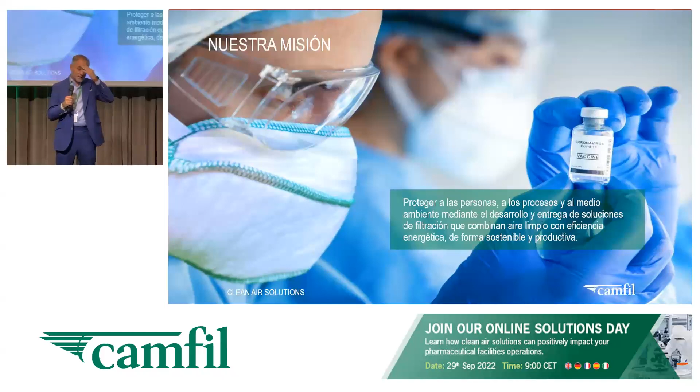That's why Camfil, if we could move on to the next slide, has 33 plants, of which 16 are in Europe, near you. Here in Spain we have 2 production centers, one in Barcelona, another in Guadalajara, where we produce most of the products you consume. That is sustainability, and that's what we have been doing.

Now, today we are in a safe environment because our air is completely clean, thanks to filters you're all familiar with. And that's all from me. I hope we're all going to have a very fruitful day. Thank you.

Well, first of all, we want to thank you. First of all, I'd like to thank you for joining us on this event we have organized for you. You have no idea how thrilled we are to be back together and to be able to clear some of the queries you put to us every day. If you've had a look at the agenda, you may have seen that we have a busy morning ahead of us. I'm sure it's going to be really fruitful.

We're going to focus on things like quality of air inside, terminal cleaning, filtration, containment, or filtration in explosive atmospheres. But before we go on to that, we believe it is essential to go back to issues such as air composition, mechanisms of filtration, or updated regulations on air filters. So let's go to our first presentation with Josep Ventura, who's sales manager for Clean Process in Camfil Spain. At the end of each presentation, we'll have some time for Q&A, should there be any questions. Thank you.

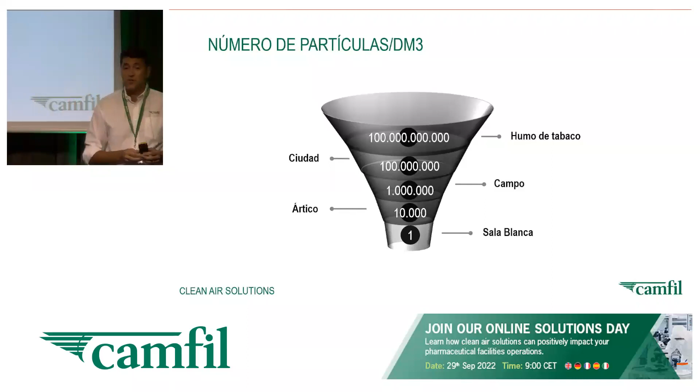Today we're going to talk about particles. We're going to see what we filter — either solid or liquid particles, with their mechanisms, etc. Now, we have a series of particles outside, and we have to fight them to make sure we reach clean room quality air levels. For example, if we want to get to 1 particle per cubic decimeter, what do we find outside? If we live in the Arctic area, in that clean room, we'd have 10,000 particles per cubic decimeter. If we have that room in a rural area, we have 1,000,000. In the city, 100 million particles. And just as an anecdote, tobacco smoke can have 100 billion particles per cubic decimeter.

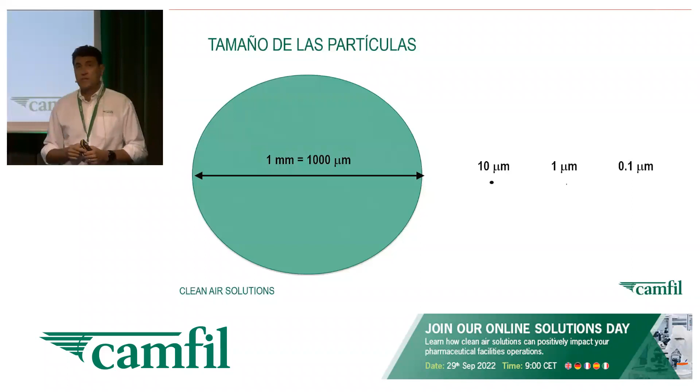Now, how about size? This is to give you an idea of 1 millimeter, which is 1,000 micra, versus 10 micra, 1 micra, or 0.1 micra. You've got to remember that the human eye can see from 10 micra. When we look through beams of light, shafts of light, we see little particles of about 10 micra — anything smaller than that, we don't see, luckily. But we'll see how many there are.

Now let me show you the 3 diameters of particles that we are going to be repeating the most in this presentation and the ones after: 1 micron, 2.5 microns, and 10 microns.

Here we have a simile of relative size so you have an idea of what we are facing. If a human being were to be a micra, 2.5 micra would be an elephant, 10 micra would be a whale. Just to give you an idea of what we are talking about.

Now, how do these different particle sizes affect us in terms of safety and diseases?

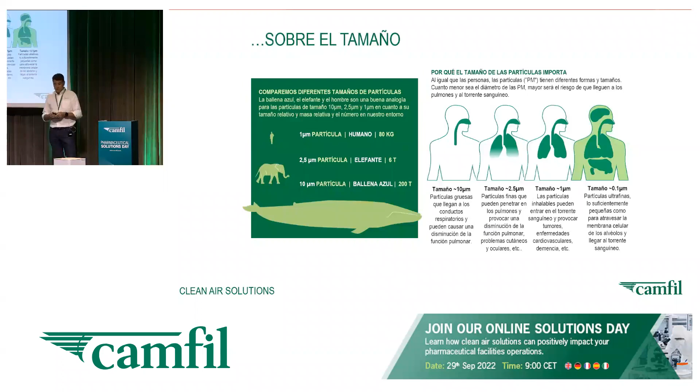Studies are being done to analyze how, for example, air pollution affects brain disease because of these ultrafine particles.

So if we take this outdoor air and analyze its composition, we see that 99.9% of particles are under 1 micra in size. So luckily we can't see them, even though we're surrounded by many, many particles.

That's how we can see one another. Otherwise we would be surrounded by fog.

But these particles, which are not many in number, they weigh quite a lot - they account for 70% of the weight. So in number, we have lots of particles which are very small, but very few particles which are quite heavy.

That's why when we design an HVAC system, we make sure the filters get rid of weight from the air first, and then we attack the rest with filters, HEPA or whatever.

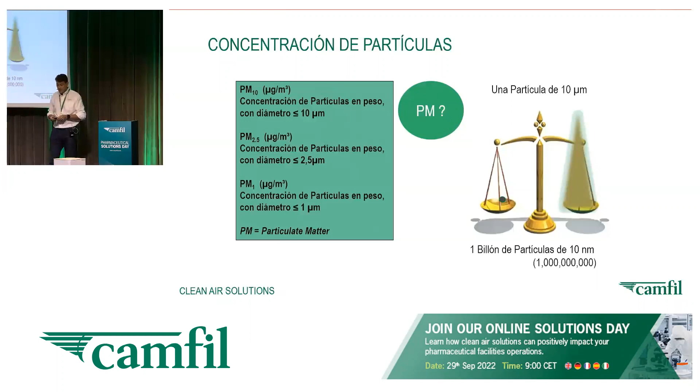PM 10, 2.5, or 1 - what does that mean? Particulate matter. So from 10 down, 2.5 down, and 1 micra down.

Apart from the particles we find in the atmosphere, we also generate our own particles. Human beings shed particles - any small movement we make might mean 500,000 particles of 0.5 micra being shed per minute. We are constantly shedding particles.

That's why in clean rooms, in controlled atmospheres, you require certain PPE to make sure we don't generate particles. Also in a clean room, we may have machines, things that generate particles.

So apart from indoor filtration, we need to renew the air to get rid of those particles. Those particles may be viable, not viable, maybe chemical products, or maybe microorganisms. So there are different types.

If we go to 0.1 micra, it would take 34 days. So small particles are not really going to deposit - they just float. And that's why filtration or ventilating air, laminar or turbulent flows, just sort of nudge them, inviting them to leave those controlled atmospheres.

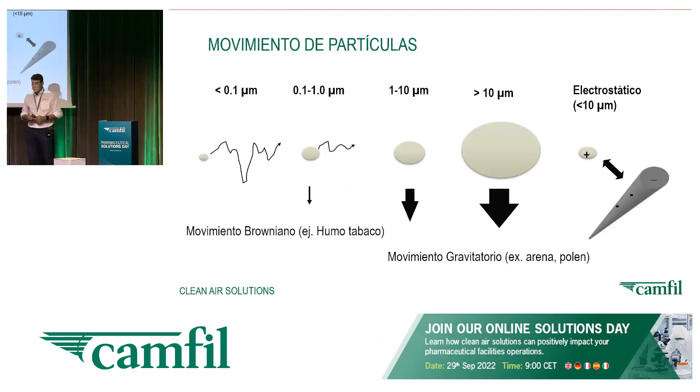Within particle movement, the smallest particles have certain movements which are very important, as we'll see in mechanisms later - what we call Brownian movement. The bigger ones have gravitational movement, they fall by their own weight. Then we have electrostatic movement, but that's separate - we'll discuss that later.

Now, filtration mechanisms. We've talked about air, what we need to filter. Now we'll see how this works to capture all these particles.

First, we have the mechanism of filtering, the mesh effect. A particle which is bigger than the mesh is not going to go through - it's like a colander, like a sieve. But this sieve effect only works for very large particles, and it only gets rid of very few particles.

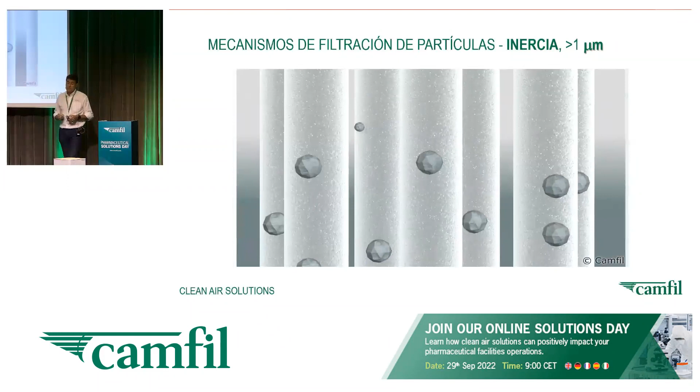Then we have inertia. This works against smaller particles.

We give the particles some speed, and that means sooner or later it may impact one of the fibers in the mesh, and the mesh will capture the particle.

Another mechanism is interception. The particle doesn't need to hit the fiber head on. It just needs to brush against it and it will be captured.

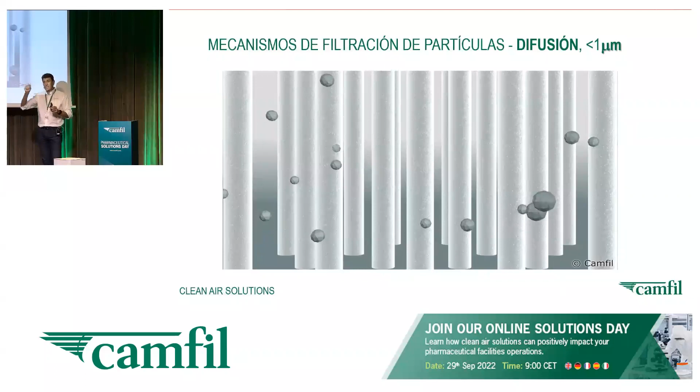And finally, and this is what really allows us to get rid of most particles in the atmosphere, is the diffusion effect. This is how we have absolute filters. As we saw before, the smallest particles have these Brownian movements, as we called them before, and that means they cover a lot more room than they would with linear movement. That means sooner or later, because they're covering so much room, they're going to be captured by any of the other mechanisms we saw before, inertia or interception, and they'll be captured by the filter fiber. Through this diffusion effect, we retain about 70% of the particles that go through the filter.

And then we have the electrostatic effect. It depends on the material, usually synthetic materials. They may have an electrostatic charge, and this attracts particles the way a magnet would. The problem is that this electrostatic charge disappears with time, and then you're just left with what you had before.

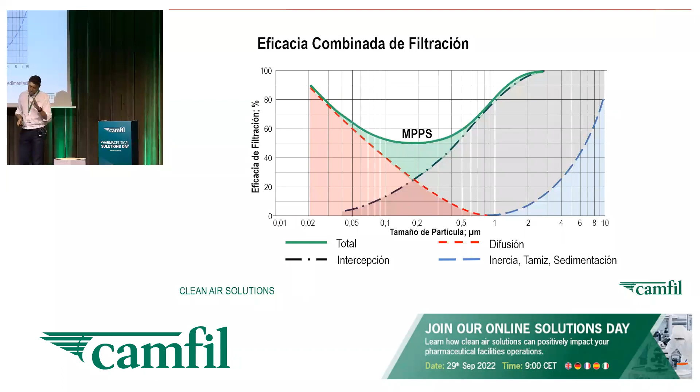We'll see this with the regulations later. Now, the combination of all these mechanisms generates this global efficacy curve. This is the inertia and sieve mechanisms, diffusion, interception, and the sum of them all gives this total efficacy curve with this MPPS area, which is very important, particularly for absolute filters.

So we've seen what we filter, how we filter it, and now we need vocabulary to discuss what we are interested in. This comes from the regulation, the classification of filters based on certain standards. Pre-filters or high-efficacy filters are regulated by ISO 16890. Before it was EN 779, and absolute filters come from EN 1822, and there is now ISO 29463. We'll have a look at them and how we classify these filters, so that when we talk about norms and standards, we know what we're talking about.

This is a little bit of background on standards. USA, Europe - the ASHRAE standards have been updated in USA, then in Europe, Eurovent and EN 779, and they all converge into ISO 16890.

16890 defines 4 steps for filter classification. First, the measurement of the initial efficacy, then we have to discharge the filter electrostatically and measure the efficacy with the discharged filter. This gives us a classification level between the 2 parameters we've seen. We'll give you an example in a minute.

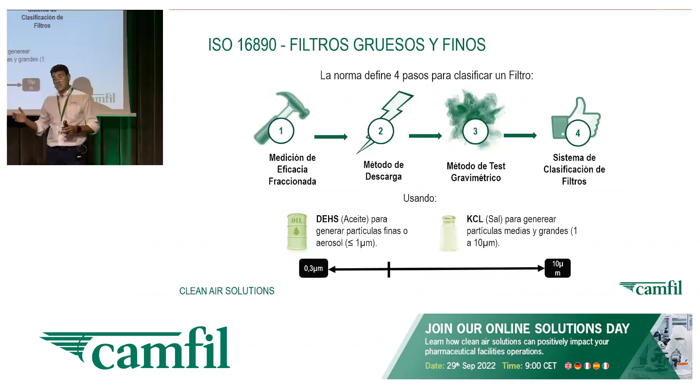For this, for small particles we use DEHS, which is the test aerosol used for absolute filters, and for large particles we use salt, KCl. This is your typical test bench for standard organizations, or ourselves in our research center in Sweden. This is where high-efficacy filters are tested.

We had a look at PM before. Now we have EPM, which is efficacy on 10 microparticles, efficacy on 2.5 particles, and efficacy on 1 micron particles, EPM. Now, this is how it is distributed.

The standard says that we need to test the filters in different diameters and see whether they pass the level required, starting with the smallest size. If we reach 50%, we're there. If we don't, we go on to the slightly bigger size. If we're there, great, and if not, we move on to the next size and so on. The best filters will be EPM1, and the most basic ones will go to coarse levels, which are even bigger than EPM10.

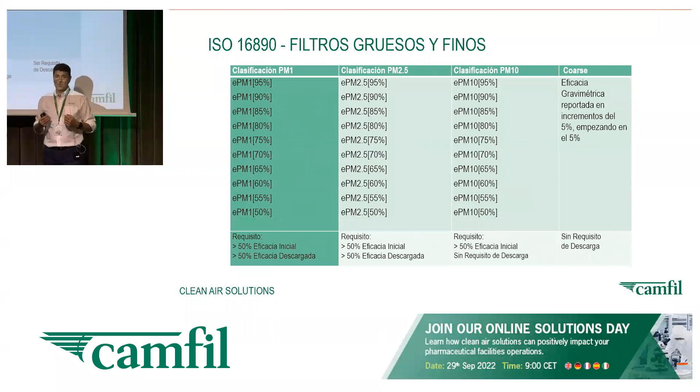And then there are a whole series of data that need to be reported in our classification report. This is a huge array of efficacy levels, but when we provide a product, we simplify it with a single classification. But the standard does give us all these levels of efficacy with the requirements - as I said before, you need to pass 50% at initial filter and discharged filter.

Let's have a look at an example to see how this works. For this, we have prepared 2 filter models. In the previous standard, they were F7. So we've taken an F7 filter for EN 779 without electrostatic effect. There is no electrostatic effect.

We see how initial efficacy for the filter in PM1 is 65%, then 74%, etc. And then when we discharge it electrostatically, it remains pretty much the same. Why? Because these filters, by nature, their material is efficient in itself.

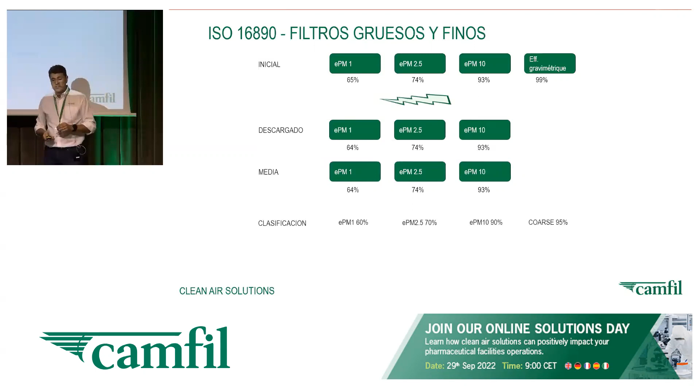It doesn't really require any electrostatic charge or anything. The standard says we need the average between these two measurements, and it is the average that gives us the classification of the filter. For EPM1, both the initial and discharged values are above 50%, which was the requirement set by the standard. So we do the average and round down. We are at 64, so we go to 60. The classification of the filter is EPM 60, and we can classify it as EPM1.

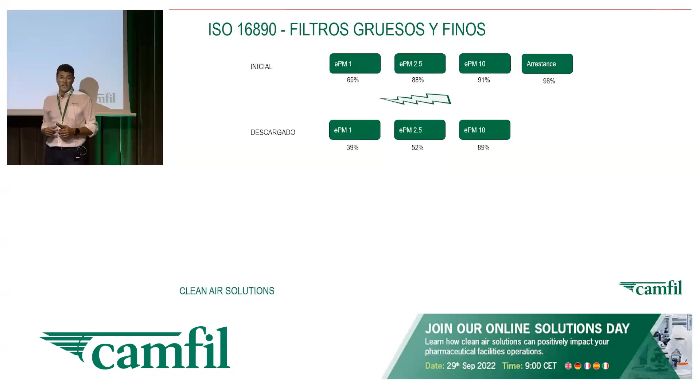We have a filter which was also F7, but it did have electrostatic charge. Initially it looks like a good filter, even better than the other one. But what happens when we discharge it? Not so good, right? There is quite a difference between the initial filter and discharged filter. This happens in a climate control unit. I mean, it's going to happen.

Luckily, the regulation is a little more transparent with these filters and can spot them. So again, we work out the average. Can we classify it as EPM 50? No. Why? Because the requirement was that both the initial and discharge measurements had to reach at least 50%. So this filter cannot belong to the EPM1 club. It needs to move on to EPM2. Here, initial and discharge are over 50%, average, round up. It's a neutral number, and it can be classified as EPM2, well, it's 2.5, EPM 2.5.

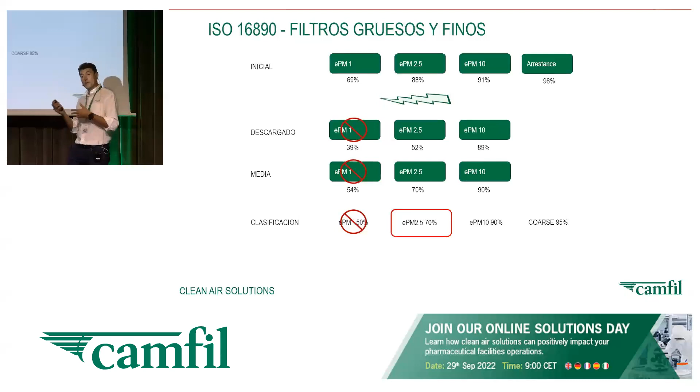Apart from the efficacy classification of filters, something else that's important, increasingly so unfortunately, is the whole energy issue. A filter consumes energy. It's a block that consumes kilowatts constantly. So what we need to focus on is making sure that the loss of charge of this block element, this plug element, has to be light. This is easily classified through Eurovent.

They've got a website, euroventcertification.com, and there we have a classification of filters according to energy efficiency, just like washing machines or fridges at home. The same thing goes for filters. You can take an EPM1 filter and see, A+ consumes 800 kilowatts a year, whereas a B consumes 1,000 kilowatts a year, so 200 kilowatts a year difference. I don't know how much you're paying for the kilowatt, but if it's 0.2, lucky you, I pay a lot more. But if it's 0.2, that would be 40 euro for one filter a year. That's sometimes more than the price of the filter itself. So that's an easy way to compare products and filters through its energy classification, energy consumption.

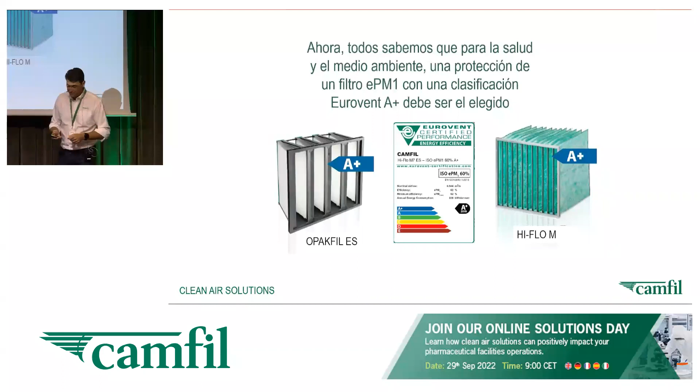So we know that a good product needs to be EPM1 first, and in energy terms, ideally it should be A+. So when it comes to specifying, choosing, or finding a product that's going to go at the end of the climate unit or protecting a HEPA filter, a recommendation would be to request an EPM product, so the higher the efficacy in EPM1 the better, and A+. With that, we know that this is a really good product. That's a simple way when it comes to standardization.

Now, HEPAs. We've had a look at high efficacy filters and pre-filters, their classification. Now let's have a look at HEPA filters. Historically, they come from the Manhattan Project, the creation of the atomic bomb. The idea there was to find a filter. They called it an absolute filter. They still use that term because the idea is that it should retain as many radioactive isotopes as possible, because there was going to be isotopes in the research process.

Through the years, many other applications for HEPA filters have been found, for example microelectronics, hospitals, food industry, nuclear industry, turbines, biosecurity, and pharmaceutical labs for clean rooms or white rooms. HEPA filters are part of many, many standards and regulations. The FDA has something to say about them, EMA, ISO 14644, EN 1714, for containment level 3. And the standard also tells us how to classify the filters.

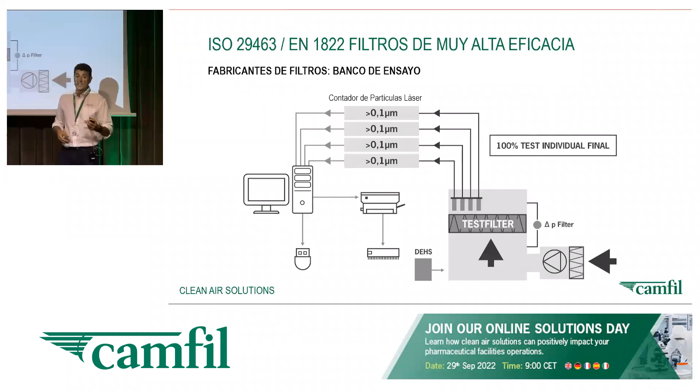Or which particles are the hardest to filter, that's the DEHS. And this is MPPS, the filter point. A HEPA filter has a minimum point of efficacy called MPPS, most penetrating particle size. That is the particle size that is going to penetrate the most. So if the particle is bigger than that, it's going to be easier to filter for us. If the particle is smaller than that...

...it's easier as well because of the diffusion effect. Remember that the smaller the particle, there comes a point where the more they oscillate. But there's a point where they are hardest to filter. That's the point we use to classify our filters, the MPPS. This MPPS point is what we use for these classifications when we talk about efficacy, like H13 99.95. That's MPPS, the hardest particle size to filter.

So when people say, what happens with a virus or a bacteria? Well, I don't really care, I'm talking about the most penetrating particle size. Anything else is going to be easier to filter. I'm giving you the hardest one, okay?

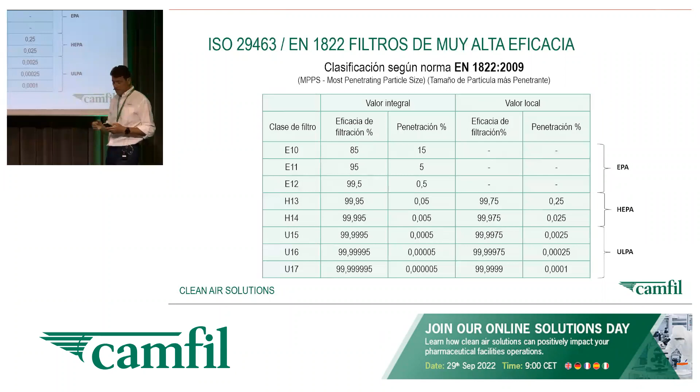That's MPPS. The classification then gives us E10 to E12, EPAs without H, and then we have H13 and 14, those are HEPA with an H. And then we have more efficacious filters, ULPA, which are usually used in microelectronics. They have higher efficacy.

This is for EN 1822, but then we said there is a new ISO standard. This ISO standard intersperses within this classification other classifications, because when we combine the European and American regulations, the Americans tended to use 99.99 or whatever. So in the combination, they have maintained all classifications, and we now have interspersed some intermediate efficacies.

But the test mechanisms are the same, and this is going to be the regulation that we're going to use the most. We have a typical test for a HEPA filter with all the data from scanning. This is local efficacy, so if one of these points were to go through the dotted line, that would give us a local leak.

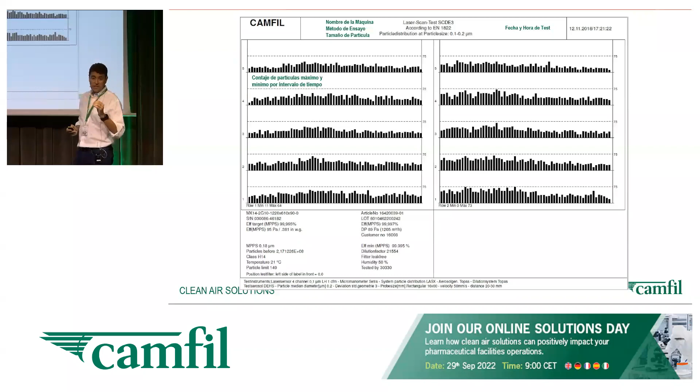So we'd need to repair the filter or reject it. All these local efficiencies will give us—well, here we have the target that we're looking for. In this case, it's an H14 with 95 Pascal at the nominal flow.

What have we achieved? We have achieved 99.997 with 89 Pascal as a target. We have achieved our goal, and the filter will be classified as H14. In this case, the particle diameter that took us longer to filter is 0.18 micron. MPPS is between 0.1 and 0.2 micron.

This is the regular gauge we have with the COVID issues. We had to work on filtering viruses, etc. With the efficacy we give, well, we filtered the virus. And then there are minimum efficacy levels, the testing parameters, etc.

And since I am running out of time, here we have different terminology that we use with absolute filters: efficacy of the filter, physical resistance. This is the resistance the filter should have so that we cannot break it when we handle it. The difference in pressure the filter has before and after the flow.

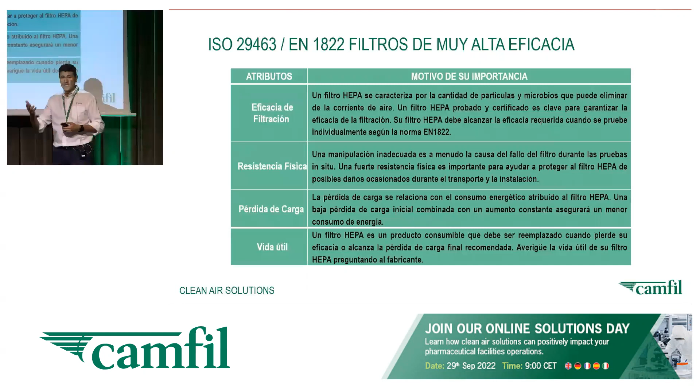Shelf life—when we have a HEPA filter it will depend on the pre-filtering levels, how many hours it works, the aerosol levels we send when we do the integrity tests, and efficacy. In a HEPA filter, we cannot lose any efficacy. The first day it has to be as efficient as the last one, or even more. We cannot lose efficacy with HEPA filters.

The particle charge is the retention capacity the filter has, or the oil particle filter through the aerosol that we generate to do the integrity tests. The filter should be ready to retain all this oil, so that we don't change the charge capacity.

And regarding Camfil products, we use decontamination products, for ducts, decontamination, etc. Places where we can find HEPA filters includes HVAC, terminal impulsion boxes, air purifiers that had a former moment of glory and will be used in the future as well. And isolating systems with clamps, etc., with different filtering materials that we use for HEPA filtering.

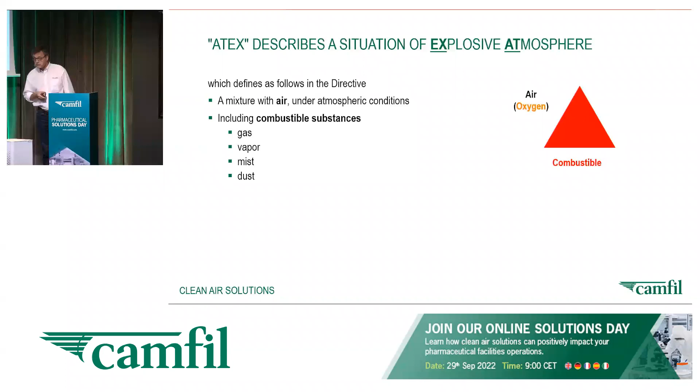You have to include some form of combustible substance in that air. That may be gas, vapor, mist, or dust. And you need an ignition source. Note, the specification expressly includes, after that ignition, the combustion needs to spread to the entire unburned mixture, and that is what defines the explosion. So you have to have the full collection of this unholy trinity of criteria to be under explosive conditions.

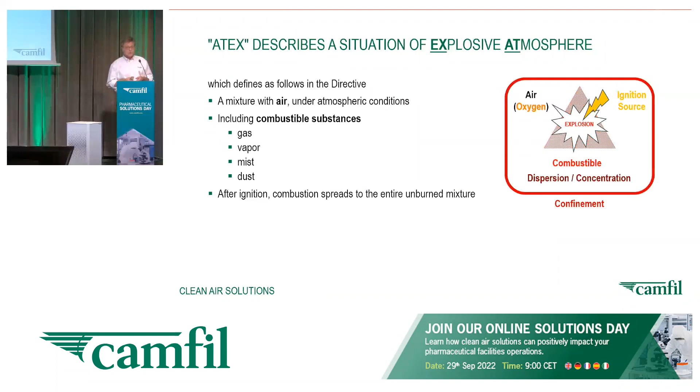For practical purposes, you actually have to consider two more criteria. Mainly the dispersion or the concentration of your combustible. Not everything is flammable or explosive in any mixture within any environment. And also confinement. What is your confinement? Does this happen in a little box? Is your confinement the room? If you have an explosion, might that confinement burst? Then you get an effect like a grenade or a bomb. And you might get secondary damages that might actually be way more important than the initial one.

So we're actually talking about a little pentagram here. Oxygen - sorry, wrong button - oxygen, you always have that. You need your combustible dust in a certain environment with a certain concentration. And if then you have a source of ignition, that is your risk, that you may actually get an explosion.

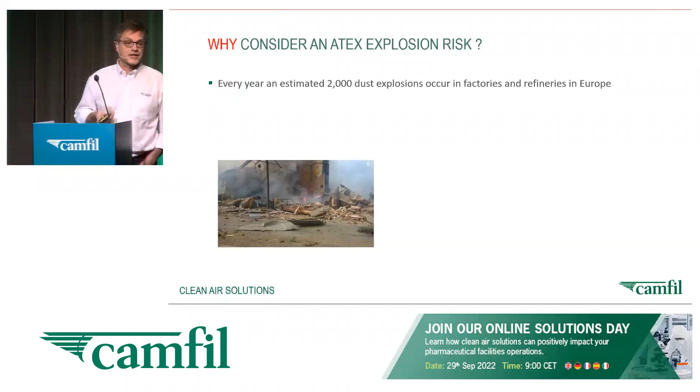And why consider this? Well, because first, the consequences may be dramatic, and also they are much more common than one might think. An estimated 2,000 per year in factories and refineries around Europe. Well, not all with that extent, or this would be a much more present and public topic. But picking one country, 50 reported dust explosions in the UK alone. That is one per week. So indeed, we have a significant cost risk and a significant health risk for people working in those environments, and that has been acknowledged by the authorities.

So this ATEX topic is ruled today by two European directives about danger zones and certifiable equipment. So on one hand, for the users, you get the so-called ATEX workplace directive, that is no more nor less a definition of minimum requirements to enable people to work under safe conditions in these environments. And on the other hand, for suppliers, you get the product certification directive, which obviously and luckily is mandatory to get equipment for use in those explosive atmospheres.

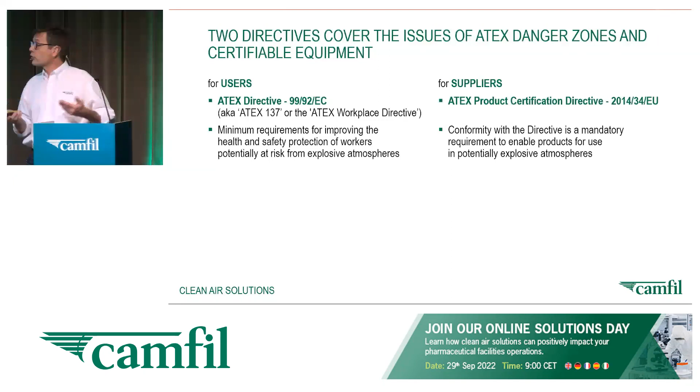In more common terms, you could say, on one hand, you get a classification system for areas and zones which characterize your risks with a certain ranking depending on what kind of combustible you encounter, in what frequency this might appear, if it appears, how long it lasts, how sensitive to ignition events this might be. And on the other hand, an equipment category system where you have safety levels and certifications that stipulate this equipment will be suitable for safe operation in those areas for those safety levels, including a very clear labeling that shows you on the product where you can use this equipment safely.

In practice, I'm going to go through this very roughly just to establish the landscape. The basic certification gives you indeed the occurrences: continuously, occasionally, rarely, from 0, 1, 2. Note we get 2 parallel classifications, one for gases, one for dusts. And to those correspond equipment categories, what kind of safety level equipment is safe for use in those.

As the saying goes, who can do more can also do less. So the temptation might be to take the easy approach, using category 1 everywhere, when you don't need to think more. That works technically, but will cost you dearly. As we will say, you should not take that easy road.

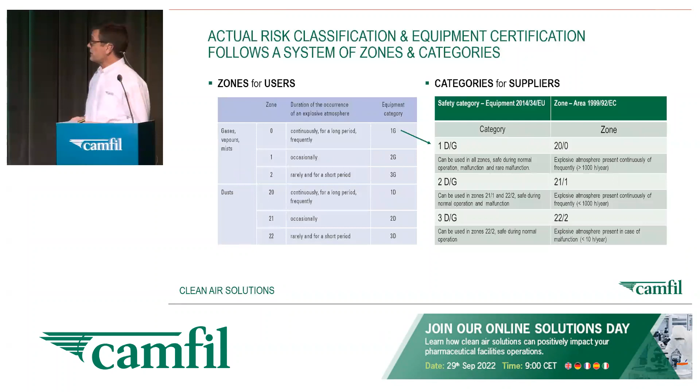The ATEX directive does not actually cover those equipment and they were actually formally excluded. I cite from the ATEX guidelines: if the only source of electrostatic charging comes from the process, such items are not considered to have their own source of ignition, and they are not in the scope of the directive. In those cases, they should not be ATEX or CE marked.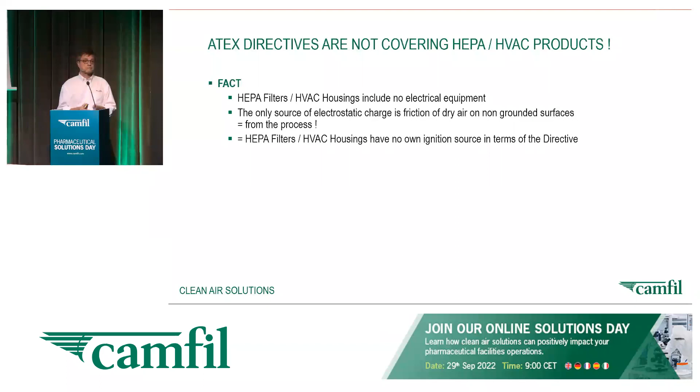If we look at what happens in HEPA filters: HVAC housings typically include no electrical equipment indeed. The only source of electrostatic charge is the friction of dry air on surfaces that may be non-grounded, indeed from the process. Direct conclusion: HEPA filters, HVAC housings have no own ignition source in terms of the directive. What do we conclude? We're just not concerned.

As a first thing, we have to conclude, well, we can't have the classic ATEX logo. There is no formal ATEX labeling, and there will be no formal ATEX certificate.

To be very clear, we're talking about HVAC HEPA housings for controlled environments, meaning you have, almost per definition, very low dust loads - not to be confounded with dust collectors that deal per definition with extreme particle loads. They also generally have some electrical equipment. So those are fully and officially certifiable, and Gabriele will tell you all about it in a few minutes.

But still, there is at least a perceived problem, because end users, they do want to operate equipment that is safe. They also want, if they have ATEX conditions, a certificate to stipulate that what you bought is safe to use, because there are regulations, there might be internal procedures, there are documentary purposes.

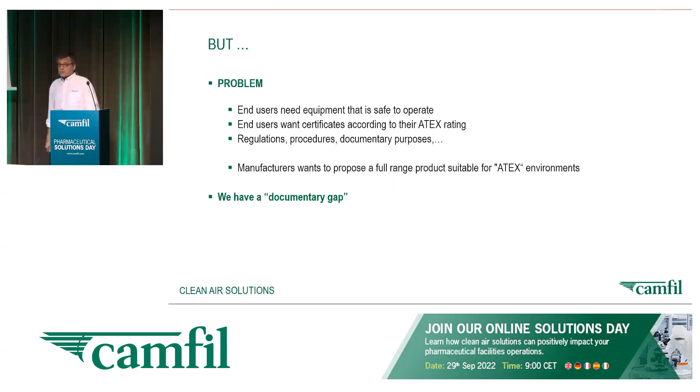And on the other hand, the manufacturers want to propose a full range of products that are asked for by the market, by their customers. So we have what I call a documentary gap between what regulations formally allow and what common sense seems to demand - seems being the key word here.

So to fill the gap, from a practical standpoint, we can propose equivalent certifications. INERIS is a renowned institute in France. Like others, they have detected this gap in the market, and they propose certificates which are fully compliant. The only thing that is different from this kind of certificate to an official ATEX certificate is that we can't call it ATEX.

This is executed along the same technical guidelines, and it gives you a fully compliant rating system. In practical terms, this is an ATEX rating. It is also a notified body, so this certificate comes with all the guarantees, since it's backed up by regular audits to make sure the products do still conform to what was certified.

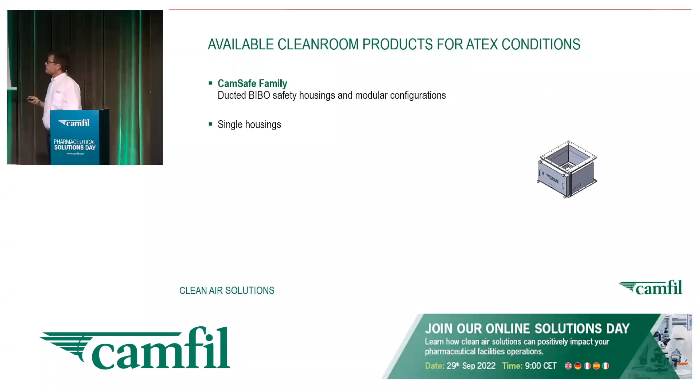In terms of product range, there is mainly the CamSafe family - ducted bag-in, bag-out safety housings, and the modular configurations based on that family. It starts with single housings, but does not stop there. There are other functional modules: supports, collectors, particle injection systems, integrity testing devices for the filters. Who says HEPA? There's also filter validation.

All of those are eligible to the electrostatic rating of the base housing. This is actually regularly requested. Those housings are typically most often in the technical area or in the wall of the clean room. We can go up to banks of 5 filter cell housings in parallel, and everything can be covered.

The other aspects are, for example, terminal housings for walls and ceiling. This is very much more exotic, actually for good reason, as we will see. And right now, they are not certified yet. We are in the process as a reaction to the request from the market. We should have a certification level beginning of 2023.

So how to approach this ATEX topic for housings where the regulation limitation says you're not even concerned? Main principle is the manufacturers can only help you so far. We can design our products, we can have them qualified to a certain category, and then you get aptitudes for use in more or less critical safety zones. The customer is in charge of his installation, a layout, and what is called zoning. They must define their ATEX safety requirements first, and the manufacturer can't help them with that.

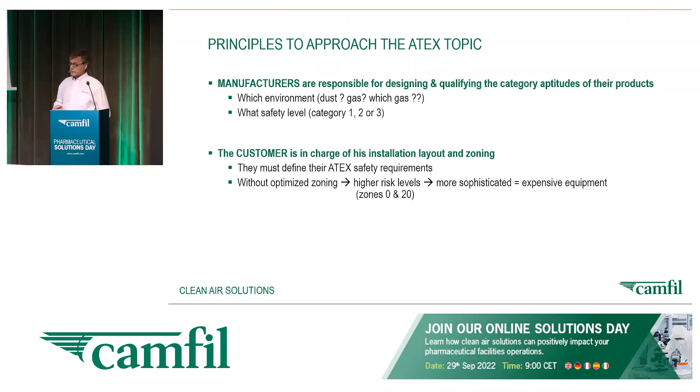Keep in mind, without optimized zoning, we'll get to that a little bit deeper, you will find yourself with higher risk levels, especially zone 0 and 20 for gases and dust respectively, meaning that would require more sophisticated, more expensive equipment. So the consequences can be quite important. But okay, consequences. Let's talk about sources first.

How about ignition? Statistically, a little more than a quarter of ignition events are mechanical sparks - grinding, hammering, not typically something that I would expect in a clean room or controlled environment.

Another quarter, human error. That is difficult to exclude anywhere. Then we get static electricity, including both from non-conductors, plastic parts, but also from conductors, metal parts, which are insulated in their environment, which are not grounded. And those are actually the more dangerous ones, since they can carry important charges.

After that you get things like fire, open flame, typically not something in a clean room either. Hot surfaces, motors, bearings, depending - you might have a mechanical issue here, and then something that's not supposed to get hot might get hot. Self-ignition, and all the rest. Mainly, we will be concerned in controlled environments about static electricity. And 9% is, well, let's say just enough to be uncomfortable. Only 9%, but yeah, as much as 9%.

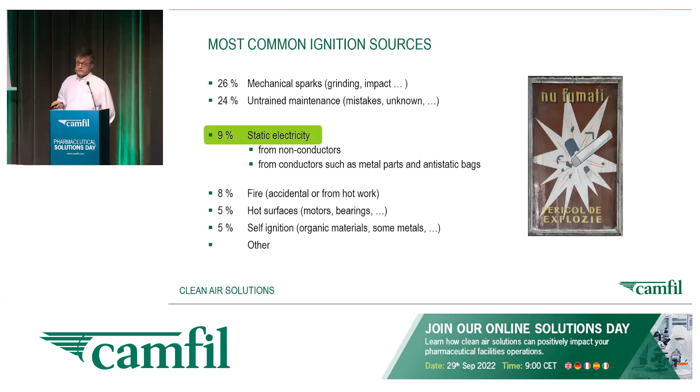So what should you do? Well, you should consider the actual risk. Where are we here? We are in clean room, controlled environment surroundings with this type of products, where you have almost by definition extremely low particle concentrations when we're talking about dust. So reaching actually flammable concentrations should be almost excluded, except accidental events or special areas.

You also have typically high air renewal rates, from like for an ISO 8, minimum 10 times per hour to over 300 times per hour, associated with often the request for laminar airflow, meaning high renewal rates, but very low air speeds. That is also not really pushing the danger as far as static electricity goes.

So is it actually possible to encounter ATEX concentrations, even considering accidental isolator leaks? Is it actually possible or probable to encounter electrostatic charges strong enough to create the spark? How dry is your process air? How fast is your airspeed, which is a measure of the friction? If you come back to our pentagon, well, the oxygen people in the room will want to breathe, so that we will always have.

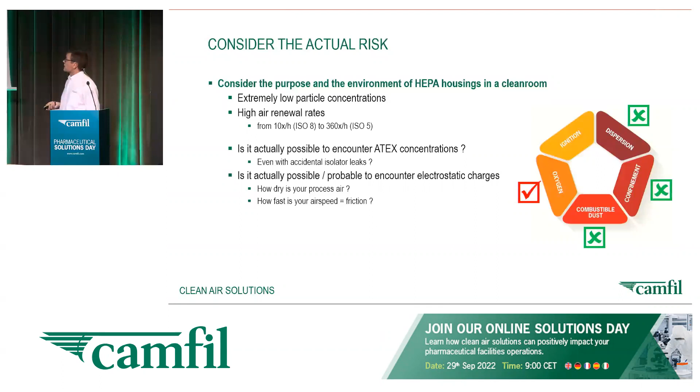Risk factor, yes, but combustible dust, its dispersion, its confinement, that is not a high risk in those environments. And ignition is actually the one element we can actively take care of in housing by designing it in a way or upgrading it in a way that all elements are grounded and static electricity does not accumulate. So we try to eliminate ignition, which means the whole ATEX risk actually goes away.

So assessment and cost mitigation will be the main task here, which passes via the activity of zoning, and that may have important consequences.

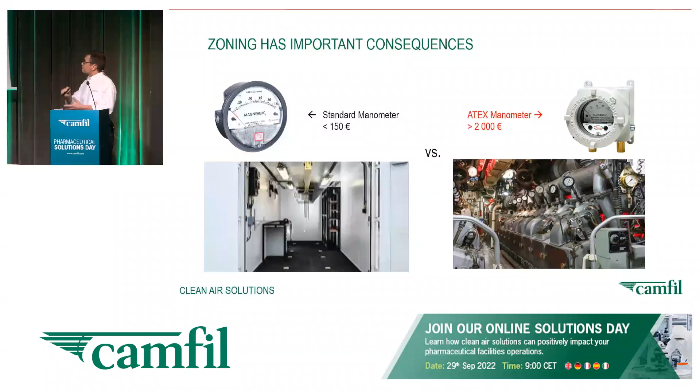I like that better, more accessible to everybody. Your fuel station where you fill up your car, the underground cistern with the truck, the actual flammable material is not considered ATEX because there is no air. This is only combustible and nothing else.

And that is the key to really determine where is the risk. If you take this analogy to a controlled environment room, you could say, oh, if you have a dust product that you need to mix and you get a bag that bursts and you get a huge cloud of dust, that doesn't mean because of that risk, you have to fully equip your entire room with ATEX class 1 equipment.

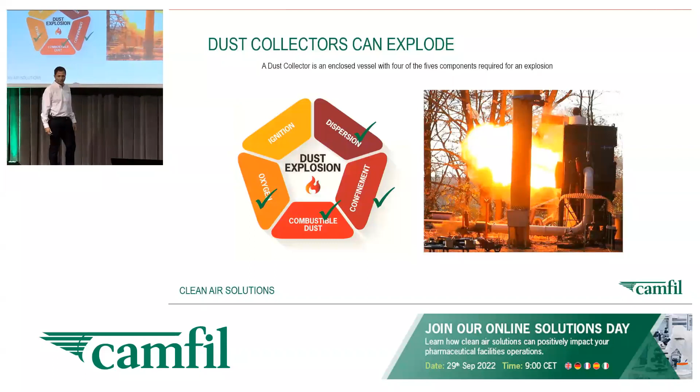This is an explosion created during our testing. We have been performing a lot of testing on our dust collector to simulate explosion. Testing is actually very important when we deal with explosion dust collector. And the dust collector is actually a place where it's very likely to happen an explosion.

But what is exactly an explosion? Basically, an explosion is a combustion of very fine particles, okay? So if you have a piece of wood and you give fire to it, it will burn nicely. If it's in your fireplace at home, it's nice to see.

But if you disperse fine wood dust in a confined environment and give an ignition to that, then it will be an explosion. And you don't want to have that in your house, right?

This happens because when the particle is very fine, the surface exposed to oxygen is much bigger than for a big piece of solid material. This creates a much faster and more powerful combustion that creates energy, temperature, and then the shock wave that is typically the first explosion, the primary explosion.

And then if the primary explosion is not protected, there will be a secondary explosion in your plant. The secondary explosion consequences can be very dramatic, and that all depends on how much dust is around the environment.

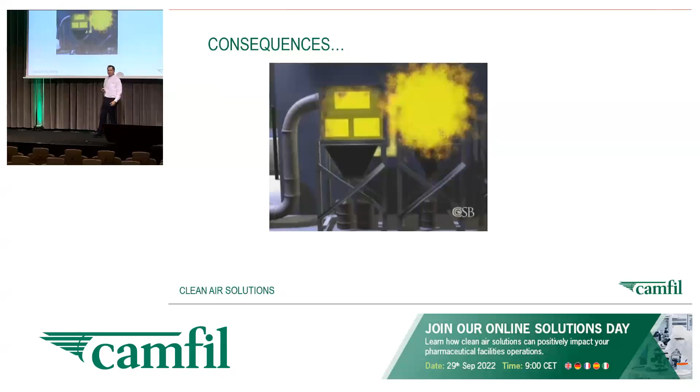So here we have some nice images showing what happens in case of an explosion. Let's say we have an explosion now in a dust collector and there is no protection. So the explosion goes back into the pre-filter, and back to the plant, propagating through the ducting, and it can also destroy the ducting and propagate to the plant, and so on.

So it propagates, going back, and then the whole system starts shaking. There will be an even larger dust cloud, and then boom, a big disaster. This is what we want to avoid.

But another important point is that sometimes we think, oh, that thing that is going to explode is very small, so I'm not that concerned about it. Well, that's not really true. Take a look at this video. This is a small explosion, it's 100 liters, but you don't want to have that in your factory, right? Of course, bigger explosions are much more dangerous and scary.

So the first step is defining whether the dust you are handling is explosive or not. There is a very large amount of dust that is explosive, and the large majority, almost all pharmaceutical dust, is explosive. Today we are talking about pharmaceutical applications, so this is a big concern because the majority of the dust you're handling every day is explosive.

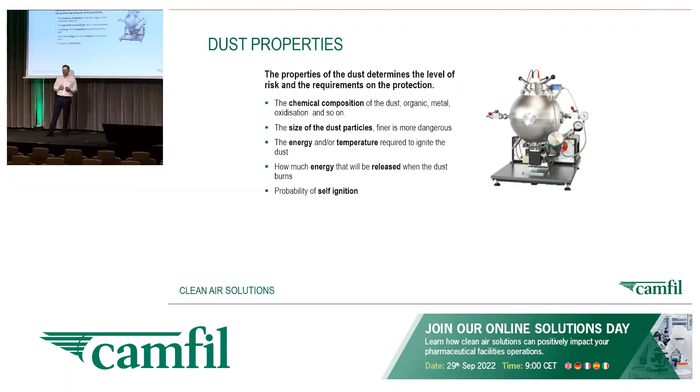In order to understand whether a dust is explosive or not, we need to dig into the properties of the dust and do some testing. It's important to know the chemical composition of the dust, the size of the particles. As I mentioned before, the more surface exposed to oxygen, so the finer the dust, the more dangerous it is. Also the energy and temperature required to initiate the explosion, the energy that will be released in case of an explosion, and the probability of self-ignition.

So these are the properties, and those properties are formalized into certain values. For example, how fast the reaction will be in case of an explosion is formalized in a value called KST, divided into 3 classes: ST1, 2, and 3. Class 1 is from 100 to 199, class 2 is from 200 to 299, measured in bar-meter per second.

And ST class 3 is 300 and above. So in that case, we need a proper KST value because the upper limit is undefined. That's how fast the reaction will be, and then we have the maximum pressure that we will reach.

Then it's important to take into consideration how easy it is to ignite the dust, the minimum energy required for ignition, MIE, typically measured in millijoules. Values below 5 millijoules are considered low. There's also the temperature called MIT, minimum ignition temperature. Then dust is grouped into dust groups.

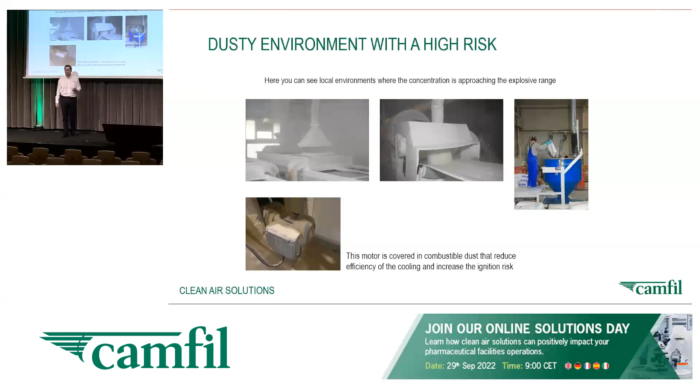It's important to also keep the floor clean. And here, something a bit against common sense: even 1 millimeter, a layer of dust of 1 millimeter can be extremely dangerous, because it can create a concentration of dust in a cloud 5 meters high of 100 grams per cubic meter, which is already dangerous. But in a cloud 1 meter high, it's 500 grams per cubic meter, which is the optimal concentration for a dust explosion. So even 1 millimeter of dust can be extremely dangerous.

So if you can see your footsteps in a dust plant, that means there is a risk, a concrete risk of dramatic consequences.

The second thing, as I said, is avoiding ignition. As Volker said before, we need to take measures to make sure that the equipment we install in a certain zone does not generate any ignition, and there are certifications depending on the zoning. Basically, we need to avoid that any spark is generated.

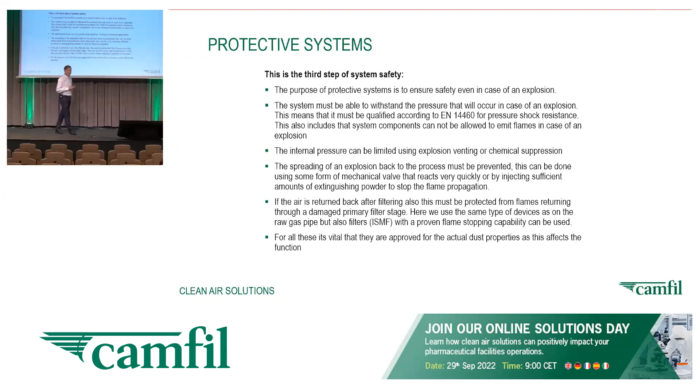In case of indoor installation, we have flameless vents, but the explosion can also be avoided by a suppression system, a system that injects suppression dust into the system. We also offer isolation valves on the inlet side, and if required, also on the outlet side, or we can offer a chemical barrier for the inlet side.

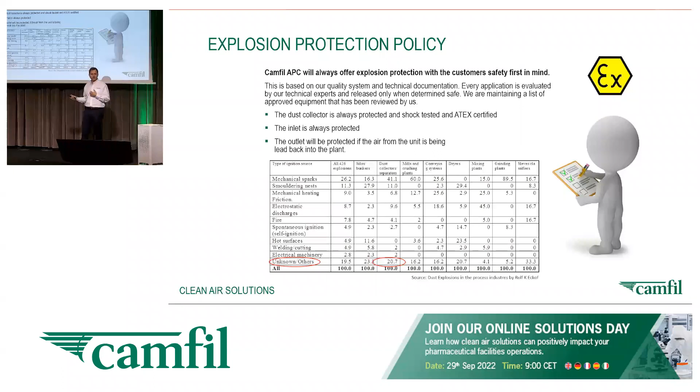One common protection used in pharmaceutical plants that avoids explosion is chemical suppression, based on fast detection and injection of a suppressant dust inside the dust collector, so that it will contain the dust and the explosion will not happen. We have different brands for this suppression system and different models applicable to different types of dust, different KST values. Most manufacturers are limited to ST2, but we have some that can go even higher, like 330 bar-meter per second. The sizing is done by our engineering, depending on the dust characteristics.

Another very common way of protecting is the use of fast-acting valves. The fast-acting valve is based on a detection system and then an isolation, and this makes sure that the flame will not propagate. It's very fast detection and isolation, and it's typically installed on the inlet side to avoid the explosion propagating back into the system. But it can also be installed on the outlet when we need to make sure there will be no explosion going outside, or for recirculation, or for containment purposes, but we'll come back to that later in the following presentation.

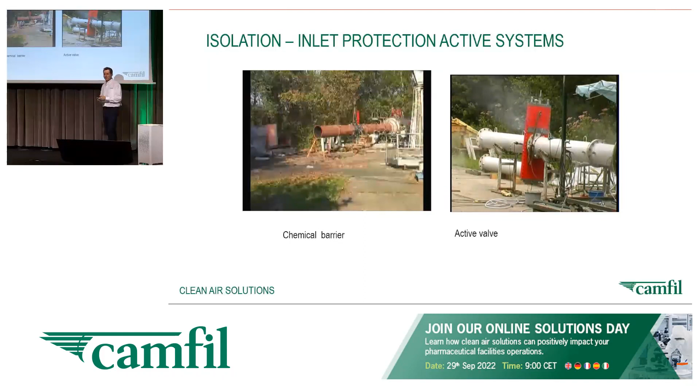Here, as I mentioned, for containment purposes, there are two videos. The first video shows a lot of smoke coming out, no flame, but a lot of smoke. So if we're handling a toxic dust, that can be a problem. That's the reason why a fast-acting valve can be better, because we can see from this video a real amount of dust going out from the explosion is much less in that case. It's very minimal with a fast-acting valve, while with a suppression system, there is still a lot of material going out, even if there is no flame. So it's safe from an explosion perspective.

Camfil offers a complete range of dust collectors that are explosion proof and especially dedicated to the pharmaceutical industry. We start from our general purpose dust collector for containment applications, the Gold Series Camtain. It's a modular system, so it can basically be used in any pharmaceutical application, from small volume to large volume.

Then we have a range of products dedicated to HVC, high vacuum cleaning, a centralized high vacuum cleaning. We have two models, a mini and the Gold Series, and we can go up to 6,000 cubic meters an hour and a negative pressure of minus 50 kilopascal.

Then we have our product range for when a compact design is required, the quad pulse range, the QPP1 and the QPP2. The QPP2 goes up to 3,000 cubic meters an hour, and the QPP1 up to 1,200 cubic meters an hour. These systems are particularly good where there are space constraints, and when the system needs to be installed in a limited space.

We also have no limitations in terms of venting in case of explosion, because the QPP are explosion proof - we'll come back to that later. In other words, in case an explosion happens inside the dust collector, it will remain inside the dust collector. They don't need any venting or suppression system. We'll come back to that later.

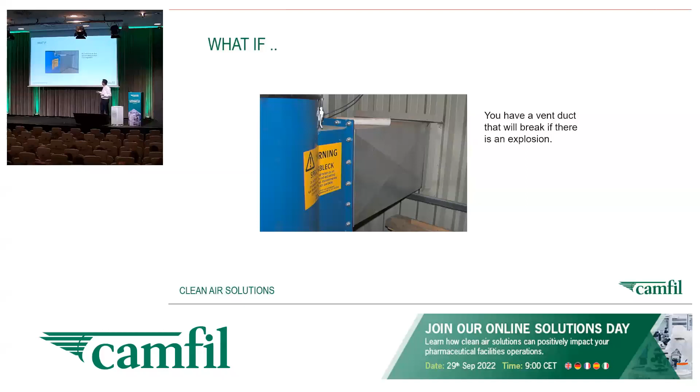So let's see what happened in some cases where the design was not properly done or there were mistakes. In this case, for example, we see this ducting that will probably not withstand an explosion. Maybe the dust collector is completely safe, but if we have a piece of duct that will collapse in case of an explosion, then we have a high risk. So we need to make sure that the entire system is properly designed, not only the dust collector.

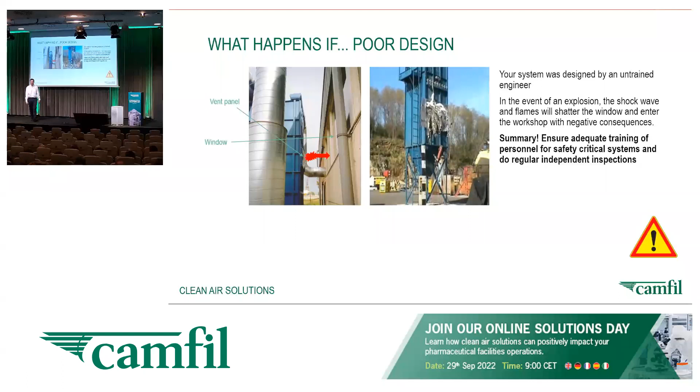Another interesting case is this dust collector with a vent panel installed in front of a window. You don't want that in front of your office, right? Because what will happen in case of an explosion is something like this. You don't want to have that coming into your desk, right? So that is another example of poor design.

All in all, what I want to say is that most accidents can be prevented by knowledge. Knowledge is extremely important. Some accidents are unpredictable, but we can take measures to mitigate the consequences. And Camfil can help you in designing your system properly, in particular for what regards my product line, the dust collectors. So this is all about ATEX from my side.

Now, if you have any questions, happy to answer. Volker, if you want to come back with me. Thank you.

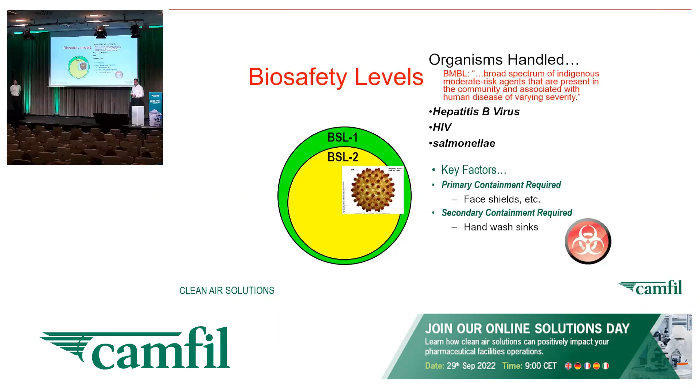So here we will use some kind of primary containment, generally a HEPA filter somewhere, a better ventilation system. There'll be more hand wash sinks. We start to introduce autoclaves for sterilization into the building. You will definitely be segregating waste. The level of PPE that your operators will use will step up dramatically.

But again, you've got to look at the risk. What risk is there? Do you need to put in a fully decontaminable, high-end stainless steel solution like some you see outside, or can you choose a simple solution? When you deal with Camfil globally, we can always offer the correct solution to fit the correct hazard. Don't spend 100,000 if you can spend 1,000, but do not spend 1,000 if you need to spend 100,000. We will advise you correctly. When it comes to BSL-3...

I don't know whose water this is, but it's now mine. Forgive me.

And when it comes to BSL-3, you're definitely going to be working in a biosafety containment facility. You will have very, very, very limited access. As well as supply HEPA filtration, you will now have exhaust HEPA filtration. The laboratory will look dramatically different. It'll be under negative pressure, and the air in the room will stay in the room, will be moved within the room.

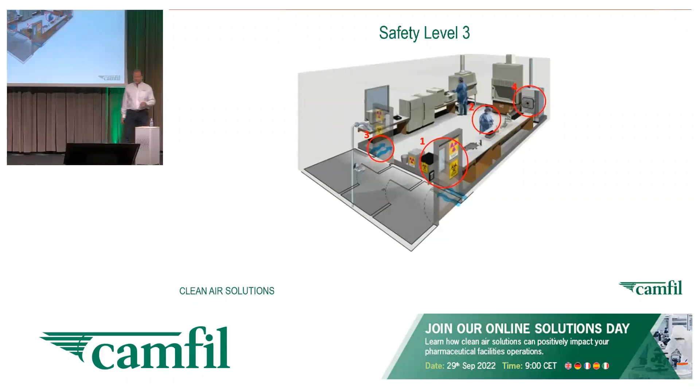You will definitely be working in a higher level of PPE for the operators. The autoclave and sterilization systems will now move inside the laboratory, and access is strictly controlled. Airlocks, safety access, restricted barriers, etc.

When it comes to BSL-4, I've only been in one in my life. It was not a comfortable experience for two reasons. Number one, I had to remove all my clothing and put on some very fancy apparel, which wasn't comfortable for anybody. And number two, you got to breathe through an airline.

So you're going to be dealing with supply HEPA, typically double HEPA, duty and standby. On the exhaust, you're going to have segregated, duty standby waste systems. You will have the operators wearing breathing suits. So again, you're looking at a very, very, very expensive build of a facility, potentially very dangerous substances inside, which you want to keep inside.

So the risk here should be designed with critical containment in mind. But again, as I said in the beginning, we don't have a one-size-fits-all product range. If you're dealing with BSL-4, we will always recommend a Camcontain. If it's a pharmaceutical application, potentially toxic compound, if it's a heavy dust load, you can recommend some of our dust filtration solutions that Gabrielle will discuss.

Or we have a range of Camsafe housings and wall-mounted housings to make the room the barrier, keeping the contaminant in the room. If it's a simple containment application, we've got a modular Cambox system, relatively inexpensive for a containment product, but suitable for use in low-risk areas. So again, we'll always advise you and choose the correct solution depending on the risk, to ensure people are safe at the best total cost of ownership and lowest cost to you as an end user.

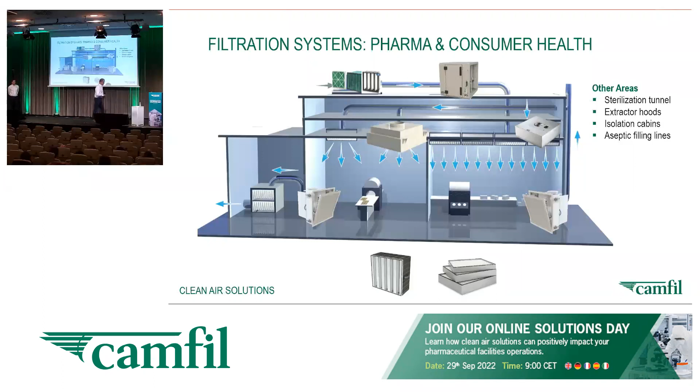So think about the risk your operators or maintenance personnel may come under and design the correct protocols. When it comes to exhaust, but keeping personnel safe, you've got a range of bag in, bag out, safe change solutions. So here you've got a wall-mounted Camsafe.

It means the air will be removed through the outlet grill. It'll go through maybe a first stage, second stage. We can build in scanning, mobile integrity probes, etc. And then the filter is changed in a bag in, bag out procedure, but in the room, so you're not moving the contaminants potentially on to the plant room. But if it goes to the plant room as that dust load gets heavier, we have other options.

Basically, we can use cleanable HEPA filters. In other words, a structure where there is a HEPA filter that can be cleaned by a blade of air, allowing collection of more dust because we clean the filter element. Or if the dust load is higher, then we have a proper dust collector like our Gold series. And here, the amount of dust is really the determinant to decide whether a static filter can be used instead of a dust collector.

So it's really the concentration of dust, the dust load that needs to be handled, that determines whether we can use a static filter or a dust collector.

Take an example: a process with 3,600 cubic meters an hour, 1 milligram of dust per cubic meter, and a filter that can retain up to 500 grams of dust. That's quite a high number. Such a filter will last only 130 hours. That is not really acceptable in a process, having only 130 hours filter life.

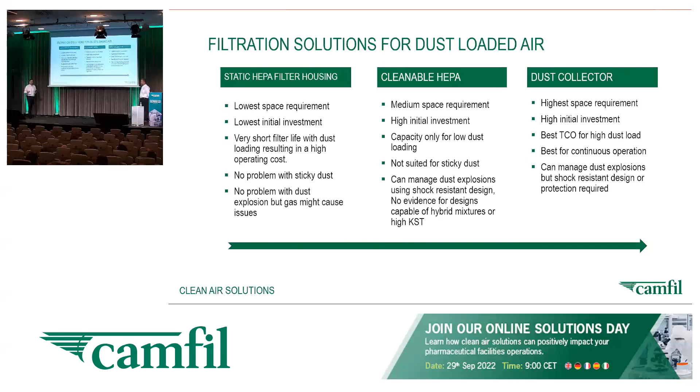And the dust collector is probably the system that has the higher initial investment, but in the long term is the one ensuring the lower total cost of ownership, because the filter element will last longer, again depending on the amount of dust that we need to handle.

While with vertical cartridges, it is cleaned properly, and there is no part of the cartridge that remains unclean.

Now, we should not forget that in the pharmaceutical industry, we deal with API material, active pharmaceutical ingredient material, and these are classified in OEB, or occupational exposure band. The higher the OEB, the lower the limit of the substance quantity that can get in contact with operators. For lower OEB, we can use any type of aspiration system, but when we go higher in the OEB level, we need an isolator system. This needs to be taken into consideration.

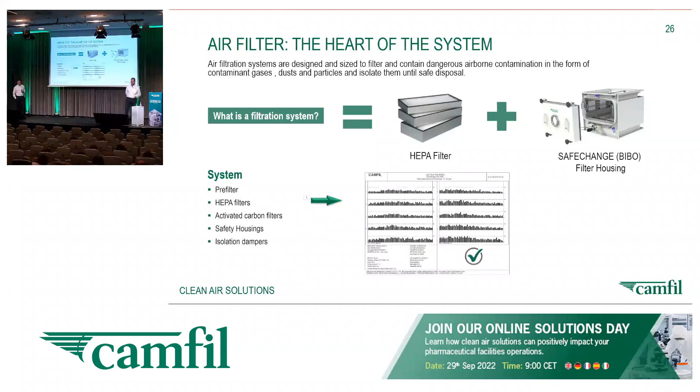The air filter is the heart of the system. As my colleague Benjamin will discuss later, every single HEPA filter should be tested and certified to EN 1822 or ISO 29463. Importantly, you should receive a test certificate for every single HEPA filter with its unique serial number, date of test, how the test was carried out, etc. Very detailed piece of certificate. But what about the housings?

A bag-in, bag-out housing is not just a box with some mechanism of putting a ring and a bag and changing it through a safe change door. That housing should be a safety device. It should be certified, it should be tested, it should be suitable for use as a containment enclosure.

Most of the particulates we filter from the air are quite large and easy to capture when it comes to HEPAs. As Pep discussed earlier, we typically deal with the MPPS, or most penetrating particle size, which is typically 0.12 microns or thereabouts. They're easy to catch, they're going to be in the filter. How dangerous are they? How do you handle them? How do you dispose of them?

So we know filters are efficient. We know that according to the standards, they're going to be 99.99, whatever it is. If it's an EN 1822 filter and we want an H14, we can say 99.995. If it's the new, more transparent and confusing ISO 29463, where they add more standards, if you say it's an ISO 45H, it's 99.995. And then they split it to ISO 50 just to be pedantic, as we do in some countries. But either way, they're very efficient, tested, certified, and it's clear what they can do when it comes to particle contamination.

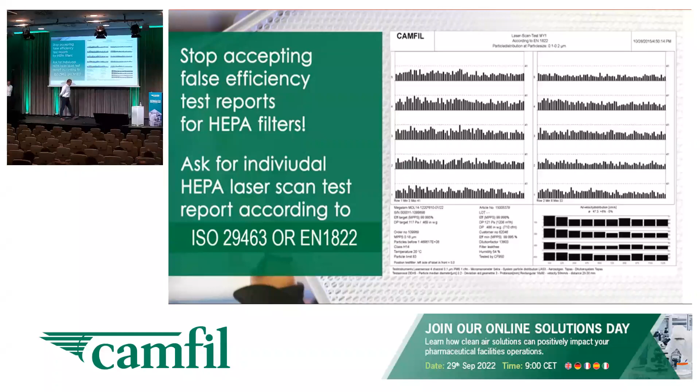You get the cert, please ask for the cert, always ensure you can get access to it easily, as validation personnel and quality personnel in your facility will need it. So again, we have some new ideas on that. But look at the other equipment.

We test every filter before they leave our facility, wherever that facility is. And as Javier mentioned earlier, we've got quite a number close to you, no matter where you are in the world. When it gets to site, unfortunately, ISO 14644, which is the test protocol for testing and validating filters on site, has excluded filters in exhaust or containment systems. And when it comes to exhaust systems in a wall, you're typically dealing with a filter you cannot get access to check behind.

So what we have come up with and would recommend for this application is what we call a mobile integrity probe. It makes injecting aerosol easier, but more importantly, and Benjamin will discuss this in more detail later, it will get you a better result. If we just look briefly here.

Typically you inject aerosol upstream of the filter. You're going to look for 100% concentration before the filter so you know you're getting the correct concentration of aerosol to perform the test. But if the person introducing the aerosol puts in too small a quantity, you may not even be able to pick up the 100%. If it does happen to find a leak in the filter, a static probe downstream may not find that leak.

What do we do to increase the smoke? We need more aerosol in the plant room. What happens? We increase the concentration of aerosol. We're now overloading the filter perhaps, still looking for the same leak. We will definitely pick up our 100% concentration. Leak is down here. And even with an improved static probe, a different shape to hopefully pick up more airflow, there's still a very good chance you'll miss that leak.

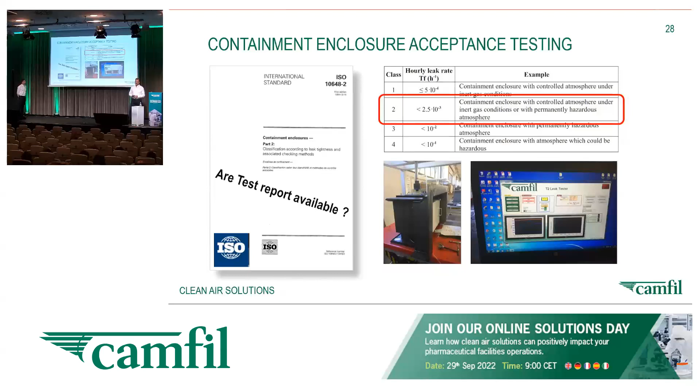Here we see, I'm going to run through a video in parallel where we see the cartridge filter removal from our dust collector, from our Gold Series dust collector, as well as the BIBO change system on a CamSafe HEPA filter housing. So what we can see here is that our procedure for changing the filter element is well documented.

There are videos documenting them. We have virtual reality procedures, and we can offer all this documentation to properly explain how to perform a proper change of the filter element. And we can see also that it's relatively easy to handle our filters with our BIBO procedure.

Very important to realize that most of your maintenance personnel will not carry out a bag in, bag out change very frequently. If you're using Camfil filters in particular, they're going to last a long time. It's what we do. So when they go to the dust collector or the housing to change a filter, let them refresh their minds to make sure it's done correctly. Again, training keeps people safe.

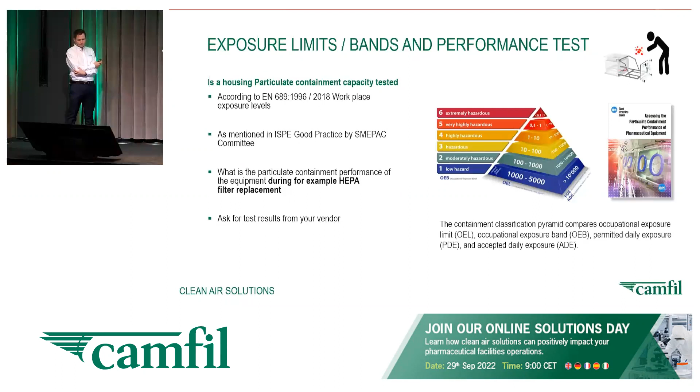And all of Camfil's safe change or containment equipment is tested to these standards, and it's a very exacting test. I'll give you an example of one of them.

To carry out a surrogate test, you're basically replicating or mimicking a hazardous compound. So for instance, if we're going to mimic a pharmaceutical type application, we might use glucose or sucrose or lactose or something safe, but which flows and handles in an airstream in the same way as the hazardous compounds you guys deal with on site. So what we do is we set up our equipment in the laboratory, and we assess the risk.

We decide on our surrogate, we plan who and how we're going to carry out the change of the filtration and the dust collection cartridges in our systems, and we go and run the test whilst the guys are physically performing the act of changing the filter.

So we're going to take surface swabs to ensure, number one, it's a laboratory environment. We shouldn't have whatever surrogate we choose present in the laboratory. So if it's glucose, you go looking for glucose, make sure there's none in the lab. You swab the surfaces around the housing before we start. There's none in the housing.

The operators wear breathing apparatus, so we pick up anything from the ambient air during the test. And then they go and carry out the physical changing of a filter or a dust collector cartridge or the liner or the bin.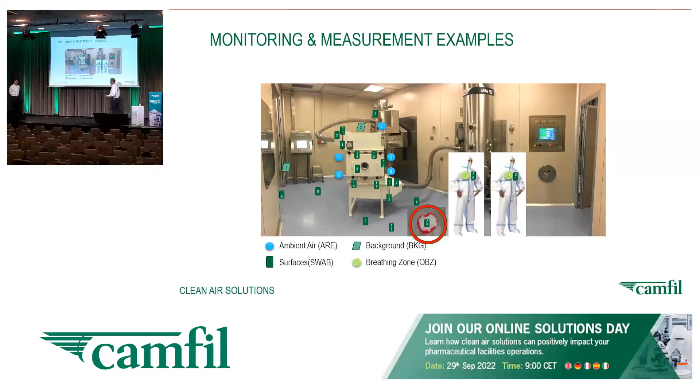As we say, there's a reporting level and a band level, and very happy to say that all of our equipment comfortably meets a level which we can call OEB5. And that includes our dust collector and our CamSafe systems. We're not the only supplier that has done this, but I would suggest that everybody who chooses to buy a piece of containment equipment asks for that type of test to be carried out. You're dealing with compounds we don't want your staff interacting with. So we should all be pressure tested. All of our housing should be pressure tested. They should be tested for real use as containment enclosures, and they should have had some level of surrogate testing carried out to give you a band or level of contaminants that you know you'll be exposed to potentially and no more. It's not a hard thing to ask from us as filter professionals or from any reputable filter manufacturer.

But nobody's perfect, believe me. So we're going to again look at some examples of what we have seen over the last number of years, which were far from ideal.

Like we showed you some examples of bad design or bad handling for ATEX equipment, also for containment we can have similar situations. So this is what happens if the dustbin in a dust collector is not properly designed or not properly used. You will have dust falling down on the floor, and if it's a toxic compound, you don't want to have that in your factory. So we need to avoid those situations with a proper system.

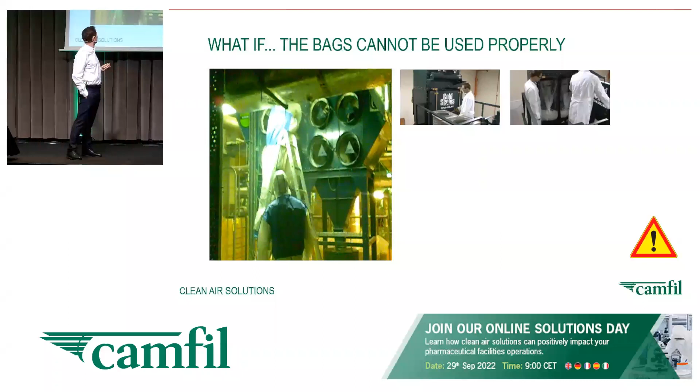Here we see a video of a BIBO change on a competitor dust collector, where you may notice in a while that okay, the system is BIBO, but it's not so easy to use. So how easy is it to perform the change, and how easy is it to perform the procedure that is required for the BIBO change, matters on the safety of the total system. Because you see here that okay, it's containing, but there is quite a lot of dust falling down, and this is not what we want. He's trying to carry out the procedure correctly, but the equipment design doesn't allow him. So you see there's quite a lot of dust falling down, and why we have quite a structured procedure to change in our equipment, and we have always been, as Alan said before, testing the system for OEB5 application.

Just as a footnote to that video, prior to me filming - I have this video maybe 15 years or more - before I said, hey guys, can I take a video of you performing this safe change? He said, oh okay, one second, we should go and put on some PPE, because they were wearing shorts and t-shirts, and we're going to carry out this change seriously. So, training. Actually they try to perform it the best possible way, right?

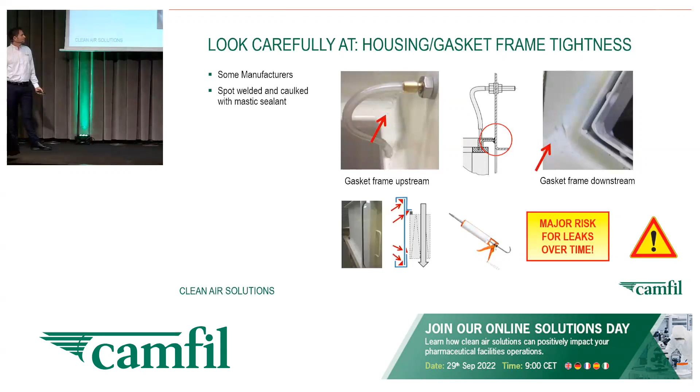Another thing you can see is like spot welding. Some of the equipment, some of the frame and housing, are spot welded instead of entirely welded, and there is some silicone gasket closing from one weld to another. It can be perfectly okay at the beginning, but over time it can become a major source of leaks. So our solution is completely welded. Again, safety and longevity - it's going to be in your plant room or clean room for a long time. It should be designed to last and fully welded if possible.

We have another - really well installed filter. Filter is clamped. The guy's going to put the bags and rings on, close the door and go away.

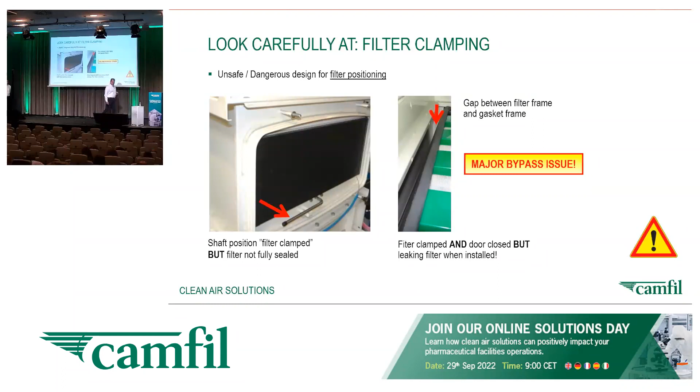Except he hasn't put the filter fully into the box. Now we've got a major bypass issue, because when the next operator comes and opens the door, he will be met with a bag full of dust rather than a filter full of dust. So again, it must not be possible to walk away from that housing and leave it in an unsafe position.

My favorite topic, oh my God. If you're buying your safety bags from the local packaging manufacturer, it's not a safety bag. If your supplier of filters buys their safety bags from the local packaging manufacturer, it's not a safety bag. If the gummy ring or the ring is separate, it's less easy to use and there's more chance for people to make mistakes. So please always ask for a real safety bag with glove holes, if possible glove handles, for safe and easy manipulation of the filters. The easier it is, the less likely people are to make mistakes.

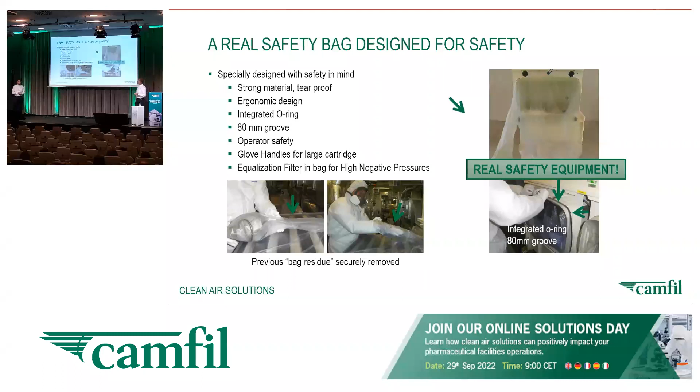And again, because these systems are used to protect people number one, and then the product from cross-contamination or contamination from those people, containment is a very, very important part of your strategy when designing. Ask for certified, tested, easy to use solutions.

And so for that, we're going to show you very briefly some of the Camfil solutions for containment. We have them on demo outside, so please join us during the break - we can give you a better overview, but just very briefly. As I said in the beginning, we have a huge range of options from relatively inexpensive through to very, very expensive, critically important components, but we can design appropriately. Camfil will never choose a cheaper solution if that's not enough - we will always advise and guide correctly.

CamSafe 2, which we have outside, is the latest generation of our standard bag-in, bag-out housing. As I said already, there are many attributes - it's fully welded, and it's got simple items like a door with a window so you know there's a bag there. There's nothing worse, and it's happened to me on site many years ago, than arriving at a safe change housing fully garbed up and ready to go, and there's no bag there. So now you've got to go ring up maintenance: sorry buddy, we've got to close down your plant room, we're going to remove this filter.

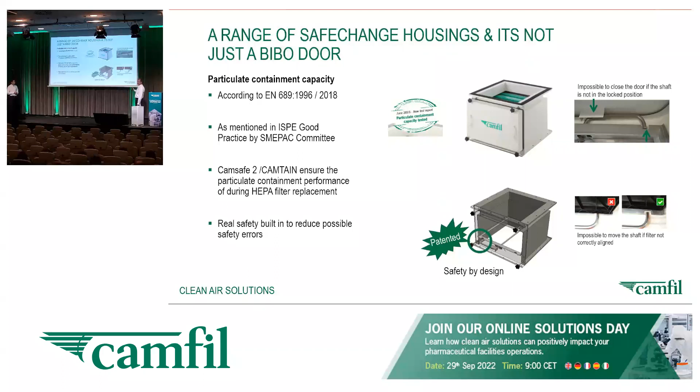And it's not just a range of safe change housings that happen to have a BIBO door. They're tested to EN 689 for pressure, tested according to the good practice guides from SMEPAC, and we have the results. Again, simple tricks so that you cannot get it wrong. You cannot fit the filter incorrectly. You cannot close the door without it being clamped. Simple, simple, simple for safety.

It's available in lots of different options. I'll go into that much more when I look at the configurator. Again, it can be a single housing, a wall-mounted housing with duct-mounted connections, etc.

And the latest iteration, CamSafe wall-mounted, means your safe change housing is now in the clean room. The contaminant does not leave your production area, but there's lots of accessories to build it up, hide it in your clean room wall, aesthetically pleasing, very safe. Lots of different options and add-on modules. And this is where it starts to get difficult to perhaps configure and design, but we've got some tools later on to help you do that.

Our Gold Series contained dust collector is our dust collector for general purpose pharmaceutical applications, and can be used in tablet pressing, tablet coating, blending, general room ventilation, granulation, chemical processing, spray drying, fluid bed drying. Basically, it can be applied to any dust collector application in the pharmaceutical industry.

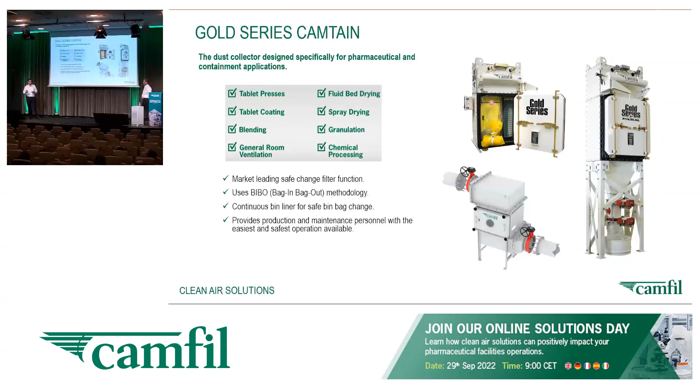This is something we have here aside. I'm happy to talk with you about that later on.

So it will ensure that the flame will not propagate outside. Of course, the flame can still propagate back in the process, so we need to install a fast acting valve to make sure the system is isolated in case of explosion. This system can also be used for high vacuum applications down to -25 kilopascal, for vacuum cleaning applications.

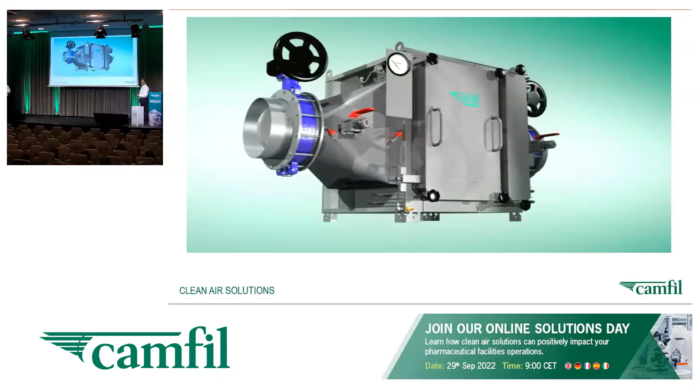So this is the high-end containment housing. You can see the bubble-tight dampers. You can see inside, when we get into more detail, that it has facilities to help you test and decontaminate safely. So we turn on the airflow, opening the door for easy view.

And at some stage you've got to change the filter. In this housing, you might notice that there are gaskets on both sides, so the filter is clamped on both sides with a gasket, so all of the contaminants go through the filter.

So before we start, close and isolate the housing, decontaminate the filters. Now all the decontamination compound is going through the filter. It doesn't go around it, it goes through it, which means in effect this housing, whilst it's a safe change housing, because we're going to decontaminate the filter and the contaminants next, it could really be used without the door. But the door is left there as the last line of defense.

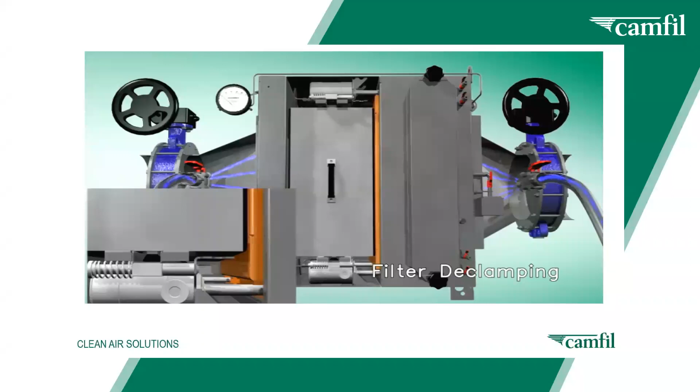You should be dealing with a clean filter when you're finished decontaminating. And again, we've got methods to check that the filter is clean, depending on the level of laboratory you're operating in, and we can tell you exactly what percentage of kill will be achieved during decontamination.

Dynamic gasket. We wish you had the fast forward button.

Still carried out in a bag, but in this case not 100% necessary. But you want to keep your people still away from any residual decontaminating agent, et cetera. And just very briefly, as I said already, here we have, sorry, the next one.

You've got a gasket on the inlet, which is a DIN gasket if needed, so you can actually test the pressure to make sure it is sealed correctly. Gasket on the outlet, which means by default that everything goes through the filter.

So in reality, the bag in, bag out bag might not be necessary, but it's left there as the last line of defense. So again, we won't offer you this if a CamBox will do, but we equally cannot quote you a CamBox if you're dealing with something that we know is particularly nasty. So we'll always design dependent on the risk that we need to protect you and your people from.

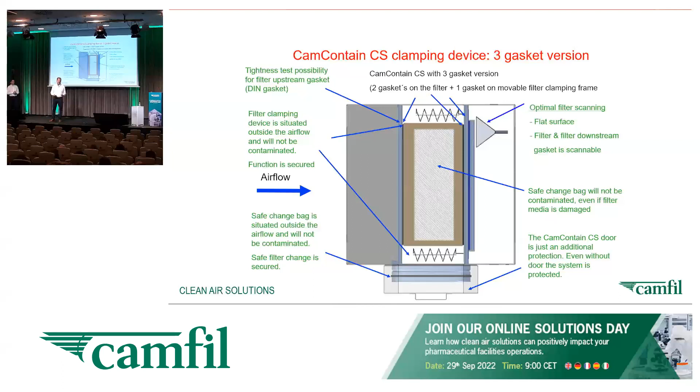So what can Camfil offer in general? I'd like to say everything. Probably nearly can. Obviously, replacement filters, not just for Camfil equipment, but for most other brands on the market. We are equal to or better than every filter manufacturer, and for those online, I have no problem saying that, even if you're a competitor.

We have individually tested HEPAs and housings. Every one of our HEPAs is individually tested, no matter what the range. No batch tests. Every single filter has a unique serial number to ensure that it's compliant with the relevant legislation.

Full list is there as to what we can do. Importantly now, in most countries in Europe, particularly for our own equipment, we can offer service, maintenance, validation if required, which takes the onus off you and your people to perform some of these safe change procedures that they may or may not be familiar with.

But we also offer some online tools. We've got a huge range called Creo, which is a consultant tool to help you design and tweak your clean rooms to make them more energy efficient, maybe by reducing the airflows but keeping it within specification, and the program will advise you. We've got LCC, a program for your ventilation systems, where you can plug in whatever filters you're using, it will give you advice as to what filter you might choose, and it'll calculate the energy savings you can make by changing something as simple as an air filter.

And again, as we show you outside, and as Pep spoke about earlier on, all air filters are now rated like your refrigerator, A to E for energy ratings. So we can show you with calculations the effect of using an A versus a B and how much money in real terms you can save for your facility.

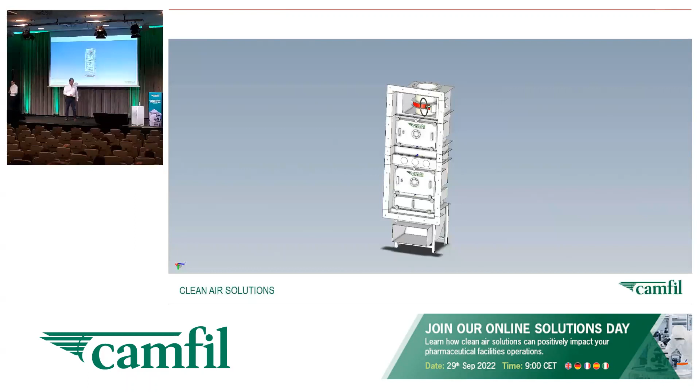Drawings that you can manipulate. You can zoom in and get real dimensions for bolt fittings and connections. You can manipulate it to change its position in your design. You can even turn it upside down, but I don't recommend it.

It goes on. It can split the components into modular drawings, a drawing for each if you need it, or it puts together a drawing for the whole item that you integrate into your building. But again, it's to make the design process easy for you guys.

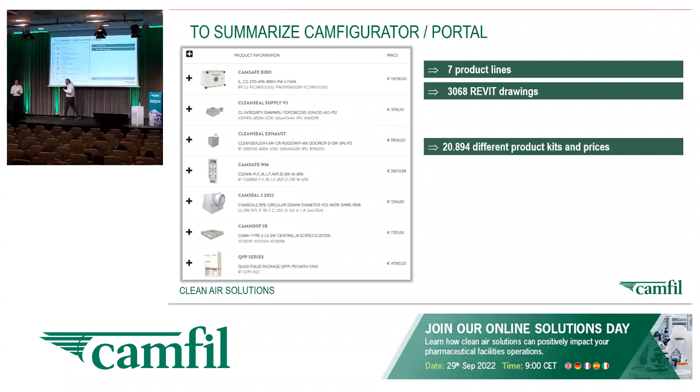So to summarize, the portal will make it easier to design. Currently there are 7 product lines, just been extended. It can spit out over 3,000 Revit drawings. We know it's the only solution of this type on the market - there are about 21,000 different kits, products, and prices in it.

But it's not just to give you an individual price for a product - other people do this. This is to give you a solution. You can design and pick a solution to suit the problem you have, not just go online and buy a simple, maybe not fit for purpose, product.

So please, if you want to get involved, let me know, let the guys know. We can give you sign-in credentials so you can mess around with it and use it at your leisure. If you want to learn more about pharma or containment, we've published many white papers and podcasts available online. We've always got these events or other events in other areas. Please join in and let's talk about clean air and make the pharmaceutical industry as safe as possible on both the dirty and the clean side.

Any questions? I'd like to say something on the dirty side, just to reinforce a concept Alan mentioned. We can offer replacement filters for the vast majority of dust collectors on the pharmaceutical market - whether it's our dust collector or a competitive one. We can offer replacement filter together with the service of replacing the filter element all around EMEA, with high quality filters for the vast majority of dust collectors on the market.

Now we get to ask the important question: are there any questions? Which means nobody understood a word I said, or else nobody cares. Any questions on any topic so far? Well then guys, we're going outside - maybe you can explain how the break works. We're going to be outside to take questions and show you some products. Thank you.